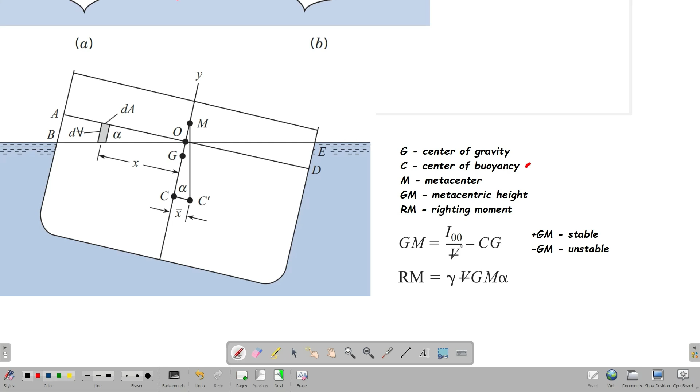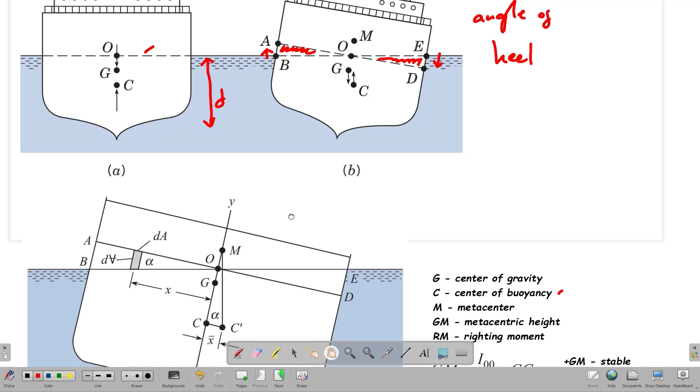Kasi yun yung volume to displace, no? Kaya para makuha mo yung volume na na-displace, kailangan mong malaman yung draft niya, yung height na nilubog ng object.

Tapos, again, yung CG is just the distance, no? Pwede mo lang makuha yan sa figure mismo ng problem.

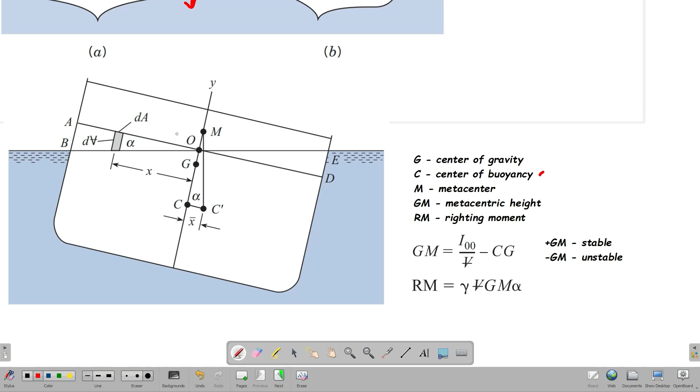Tapos, meron din tayong tinatawag na RM, or yung righting moment. Kung meron tayong overturning moment, yun yung papa-overturn dun sa object natin, meron din tayong tinatawag na righting moment, yung moment na pwedeng magpabalik dun sa stability ng object niya.

Yung equation natin is just unit weight times the volume displaced, tapos yung GM, which is yung makukuha natin dito, no? And then yung alpha or yung angle of heel. Okay? Yun lang, no?

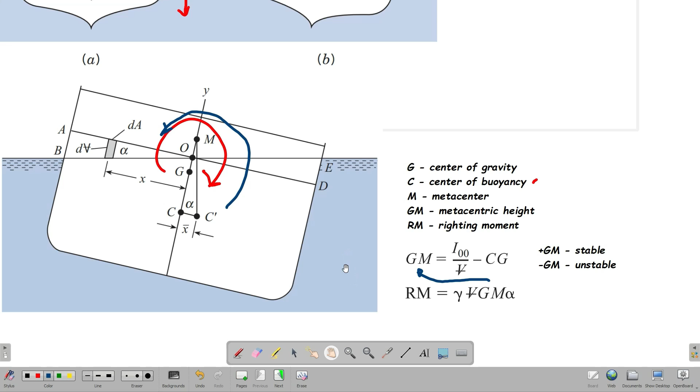Yun lang yung mga equations na kailangan natin para dun sa metacentric height or yung stability ng floating bodies.

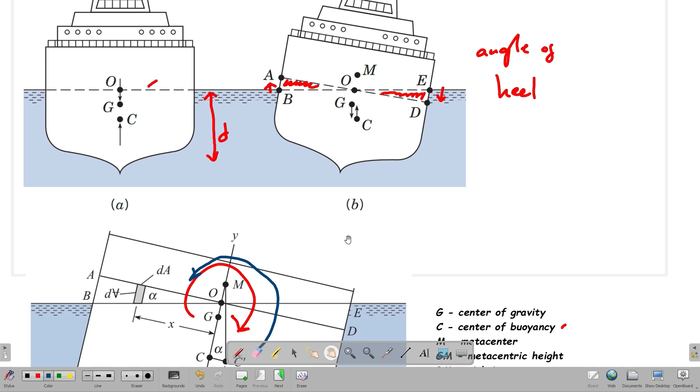At again, yung iba naman is apply lang natin yung prior knowledge natin sa statics at saka sa strength, or magagamit pa natin sa strength. Sa statics siguro ganun, yung mga summation of moments at saka summation of forces.

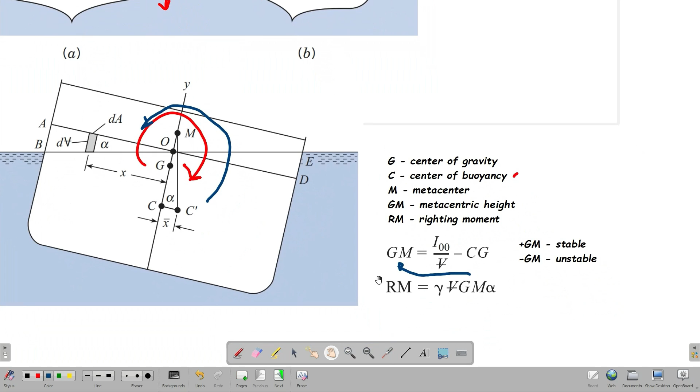Okay? So, para mas maintindihan natin yung equations na to, i-apply natin siya sa isang sample problem. Sample problem on metacentric height.

We have a block of wood, 30 cm square. Ibig sabihin, 30 by 30 cm yung cross-section niya. And then, yung length is 60 cm. Tapos, meron tayong weight na 318 Newton. So, ito yung figure niya. 60 yan yung length, tapos yung cross-section naman is 30 by 30.

At, pinapa-determine sa atin if the block of wood is stable. So, stability lang. Kailangan lang natin malaman if si GM is positive, okay? O yung metacentric height natin is positive.

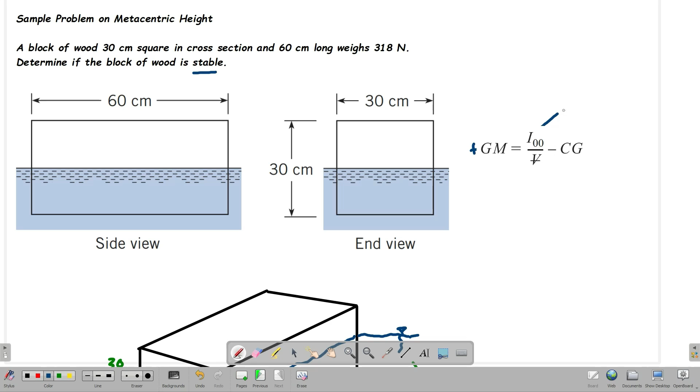So, first, alam natin yung IOO is just the moment of inertia dun sa water line.

Yung pagtitingnan natin dito sa figure natin, pag i-analyze natin yung object, syempre, mas malaki yung moment of inertia sa longitudinal axis na to, no, compared dito. Common sense lang naman to, no? Pag titingnan mo yung ganito yung dimension niya, ibig sabihin, mas prone siya sa overturning dito na side, no? Compared sa dito na side.

Pag ilalagay mo yan sa liquid, yung blue na line dito is yun yung liquid natin, no? Ilalagay mo sa liquid, mas posibleng mag-overturn siya dito sa axis na to, compared sa axis na to. Ibig sabihin, ito yung magiging base niya, tapos ito naman yung magiging height.

Kapag kukunin natin yung IOO na BH cube over 12, yung equation na to is used for rectangular na mga areas, no? Recall nyo lang yung mga moment of inertia formula natin sa statics of rigid bodies, dun sa saan ba ito ma-apply? Dun sa pagkuha ng center of gravity, sa centroids, meron yan. Okay?

So, ito yung base. Ito yung base kasi ito yung base ng pag-ikot niya, no? Tapos, ito naman yung magiging height. Yung rotation niya again is pag ganito, no? Base times height. Pwede din naman na ganito yung rotation niya, no?

Erase na. Ay, na-erase to lahat. Pwede din naman na, basta ito yung axis na rotation, pwede pa ganun din yung rotation niya, no? As long as ito talaga yung axis of rotation niya, kasi dun sa placement at saka dun sa dimensions niya.

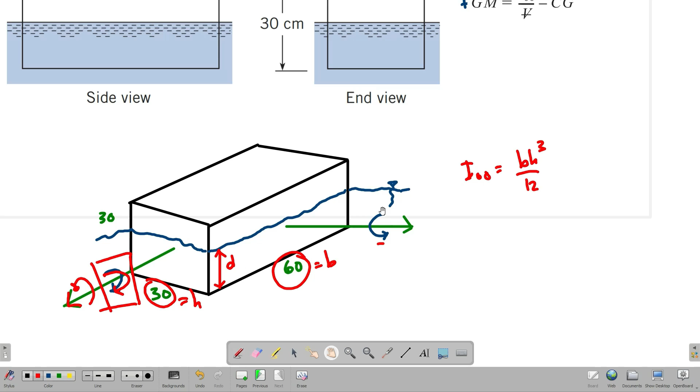Okay? Meron na tayong IOO. Yung volume displaced naman, kailangan natin kunin yung kung ano yung draft niya, no? Ano yung draft? Which is the D. Kasi yung volume of displace natin, ito yung magiging height niya, ng volume ng liquid na na-displace.

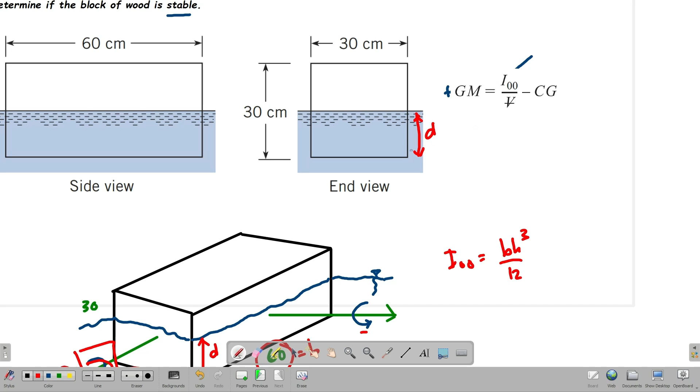Okay? Evaluate muna natin yung IOO natin, or the moment of inertia. Yung base is 60 cm. Base times height, BH cube over 12. 30 yung magiging height, cm. 12 divided by 12, so cube pala yun, 12 pala yun sabi ko. So, we have IOO equals BH cube over 12.

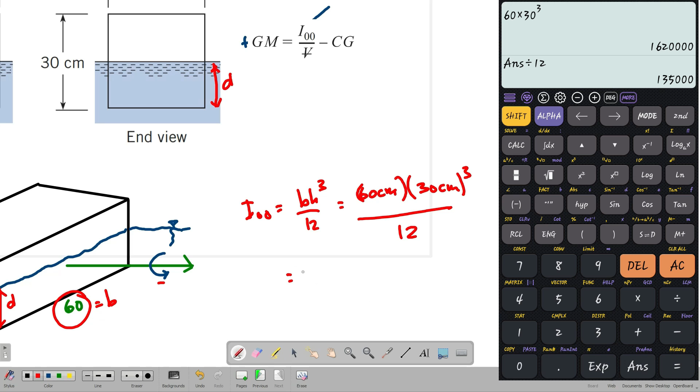That's equivalent to, dito tayo sa calculator natin. 60 yung base, 60 times 30 raised to the power of 3, tapos divided by 12. So, 135,000 cm yan lahat, no? We have 135,000 cm to the 4. Meron na tayong I.

Ang V naman, kailangan natin makuha si D. Paano ba natin makuha si D? So, stable yan, no? Stability. Ibig sabihin nun, summation of forces along Y equals 0.

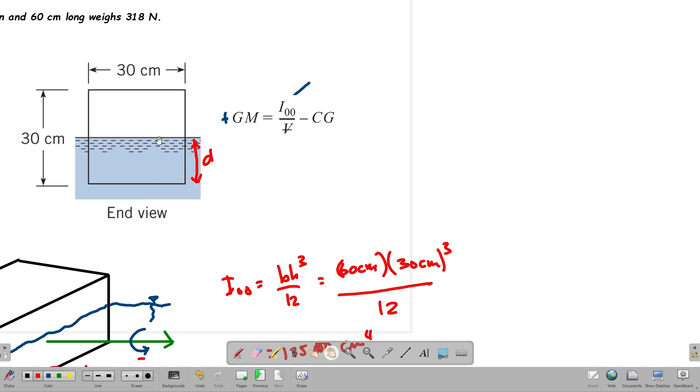Forces na involved dito, of course, merong weight yung block of wood. And then, of course, meron din siyang buoyant force na tumutulak sa kanya pataas. So, we have FB.

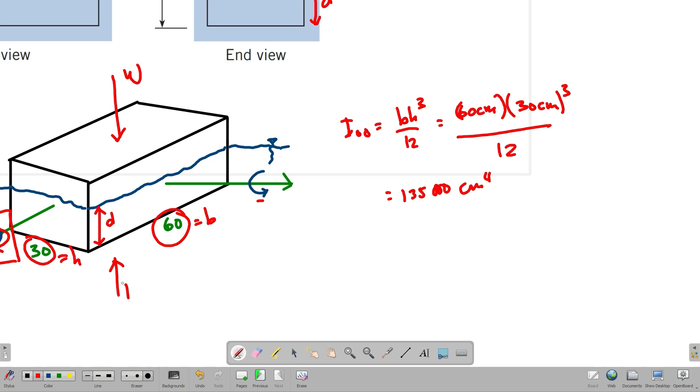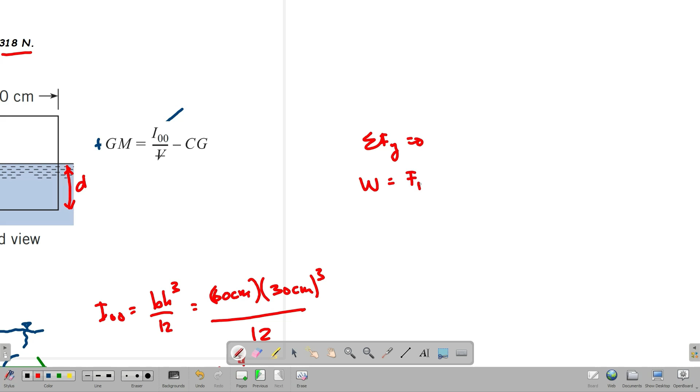So we have summation of forces along y equals 0. Of course, only two forces are involved there. We have W equals buoyant force. So, given the weight of the block of wood, which is 318 Newton.

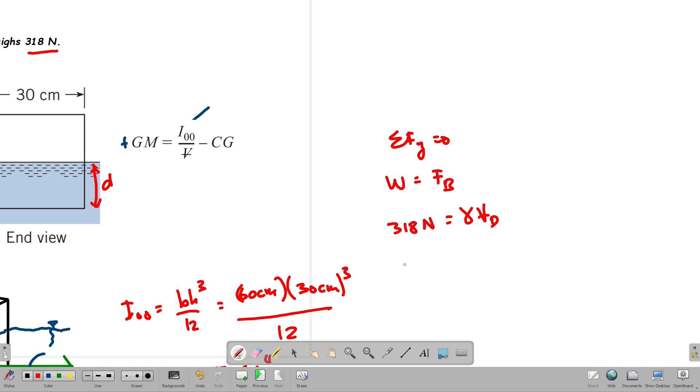So this is 318 Newton equals, the buoyant force equation is the unit weight of the liquid times the volume displaced. The unit weight of the liquid, it's not written, but I think this is water. So it's not written, but in the problem, that's water. So the unit weight of water is equivalent to, let's write again 318 Newton. Unit weight of water is 9810 Newton per cubic meter, which we'll use, and then multiply by the volume displaced.

So to get the volume displaced, let's divide the two. We have 318 divided by 9810. Oops, missing a 0. That's 0.0324 cubic meter. So that's the volume displaced.

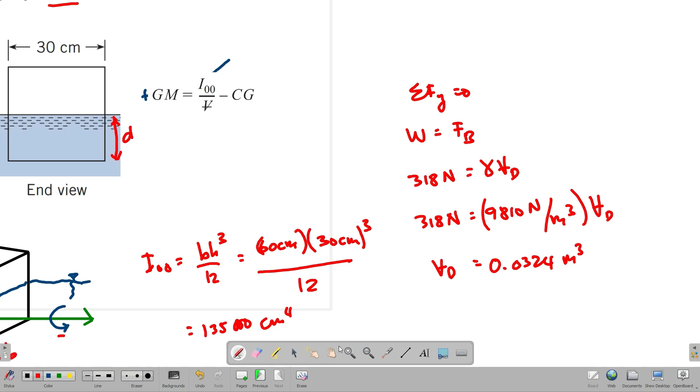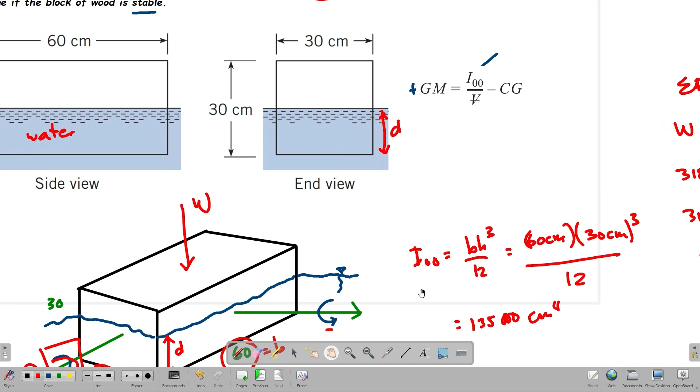Okay, so now we have values for V and Ioo. So now let's go to CG. CG is just the distance from the center of gravity and center of buoyancy. So in our figure, 30 is the height. So that means the center of gravity is in the middle, somewhere here. That's the center of gravity, since it's a square, so the center of gravity is really in the middle.

Which is equivalent to, this is 15, since it's in the middle. So this is also 15. This one is also 15. This one is also 15. Now, the center of buoyancy is the center of the submerged part of the object or our block of wood.

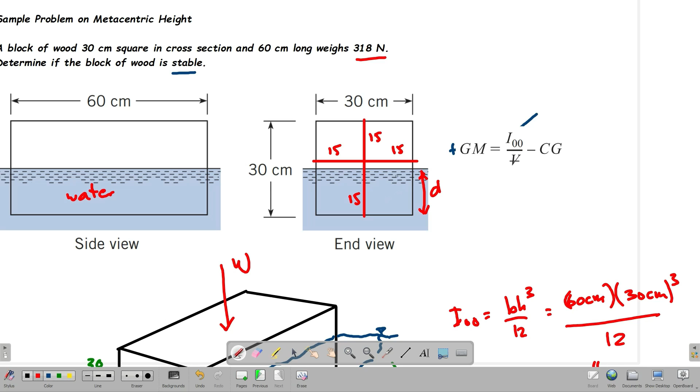So we don't know D yet, but we can get that D from our volume displaced. So we know that volume displaced is equivalent to the volume here. So that's the volume there. Let's delete this so it's not too cluttered. So that's 60 by 30 times your D, the draft.

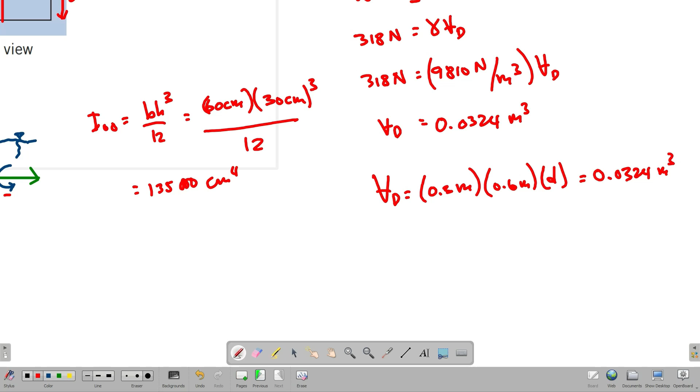So volume displaced equals cm, but this is in meters, so let's convert the cm. That's 0.3 meters times 0.6 meters times D, and then we have equal to 0.0324 cubic meter. So D is in meters now.

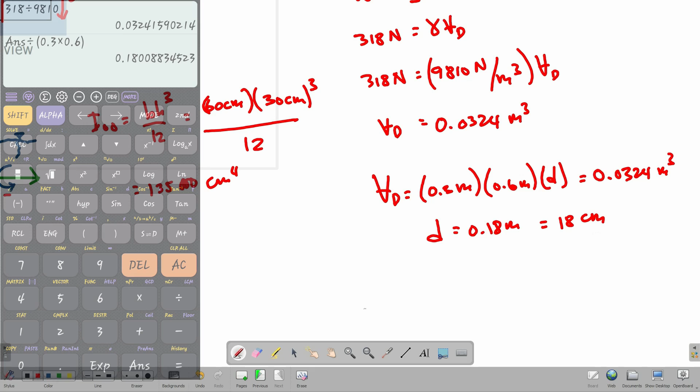So let's just divide. Divided by 0.3 times 0.6, that's 0.18, or 0.18 meter, or we can also say that's 18 cm. So therefore, we now have the draft, 18 cm. So this is equivalent to 18 cm.

Therefore, the center of buoyancy is the middle part. Let's make this blue, the middle part of the water, or let's replace it with a straight line. So this is 9 because this is the middle part. So therefore, the distance from this blue line to the red line is our CG. Because this red one, this is the center of gravity, and this point is the center of buoyancy.

So CG is just equivalent to 15 minus 9. That's right, this length. 15 minus 9, that's 6 cm. Okay, so that's 6 cm. So now we have CG.

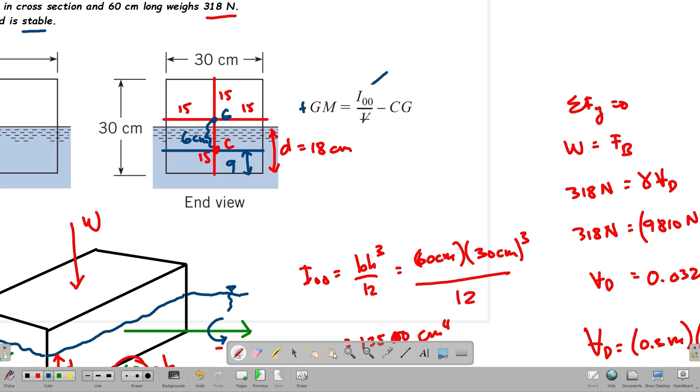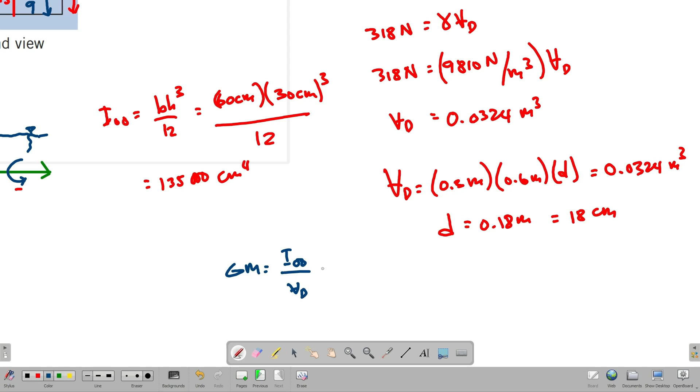So let's evaluate GM now. GM should be either positive or negative. So we have GM, let's write the equation again. Volume displaced minus CG. So our Ioo is 135,000 cm to the 4th, divided by the volume displaced which is in meters.

So let's convert. We have 0.0324 meter cube. Let's convert this. So 1 meter is to 100 cm, then cube it. Then minus CG, 15 minus 9, which is 15 minus 9, which is 6 cm.

So we have GM equivalent to, so now we'll see if it's positive or negative. We have 135,000 divided by 0.0324 times 100 raised to the power of 3, then that goes below, equals minus 6, that's negative 1.83.

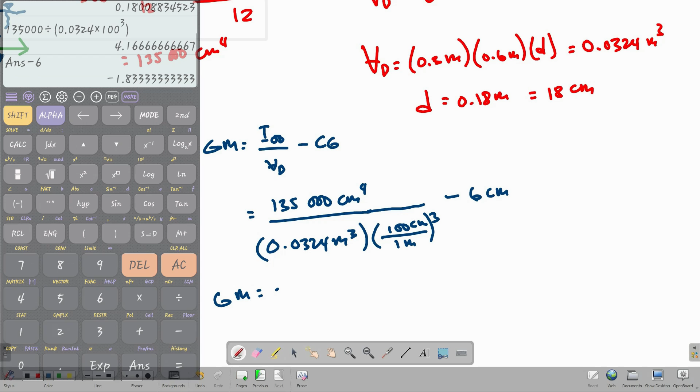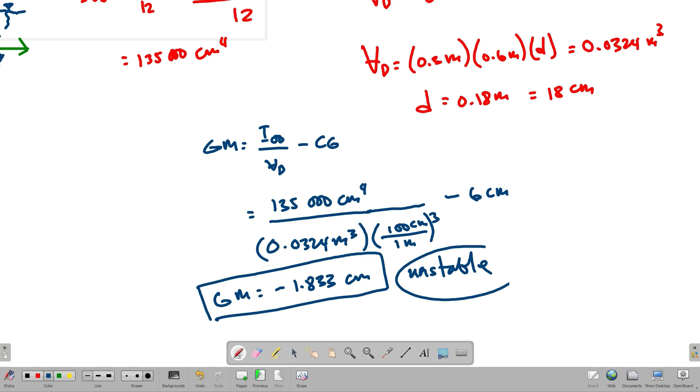So negative 1.83 cm, that's our answer. So therefore, because of that negative value, the block of wood is unstable. So it's unstable, because it's negative. That's the only thing we need to check, whether the floating object is stable or not. So GM alone tells us that.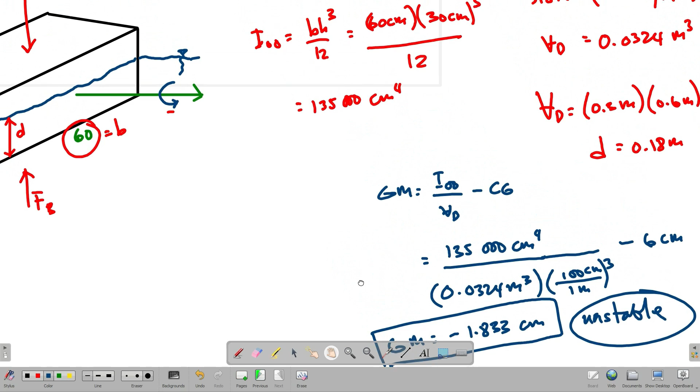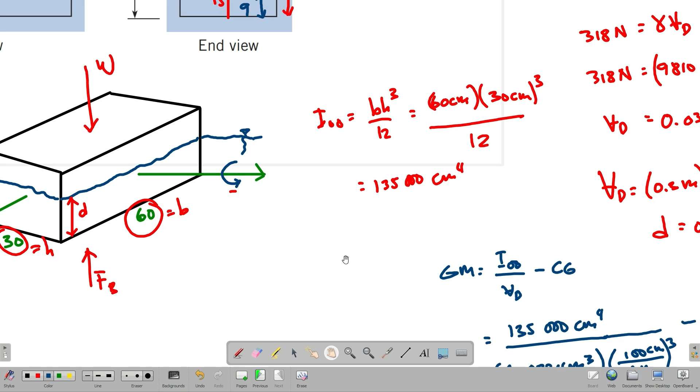So I think that's it for this sample problem. The metacentric height is a bit tricky, but I think you really need to memorize this because it comes up in the civil engineering board exam, the licensure exam. So I think that's it for this sample problem, see you in the next sample problems, and thank you.